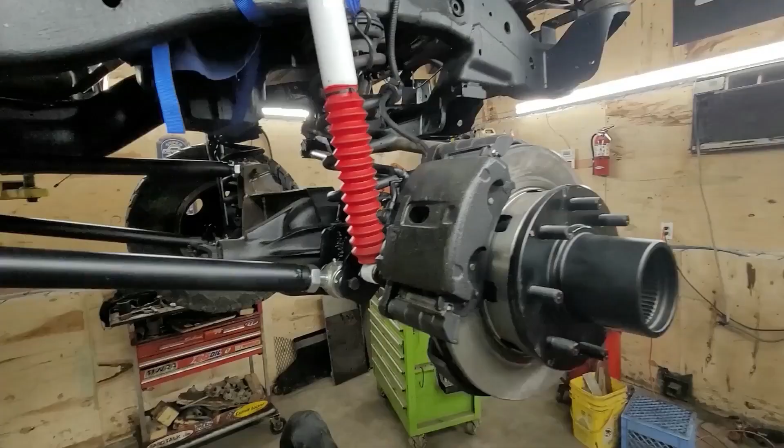Alright, big day here, guys. Just got the plate for this thing. It's insured, registered, all that good stuff. Legal, as far as the government's concerned. Other than if they took a look at it, it wouldn't be, but they wouldn't know what they're looking at anyways. We're sure of that.

Been bombing around here at my dad's place at the farm for a few weeks, just getting the tune kind of dialed in. There's my plate, so I'm gonna get it over to my house and we'll finish up. I'll get the plate on the bumper and a few other little things to take care of, but she's a performer, just performing.

So do some more tuning on it and get the radio, passenger seat shotgun. Told him he could get shotgun the whole time we've been working on it, so now's the time. But we got just a little bit of petrol here, we'll get that dumped in her and we'll be off.

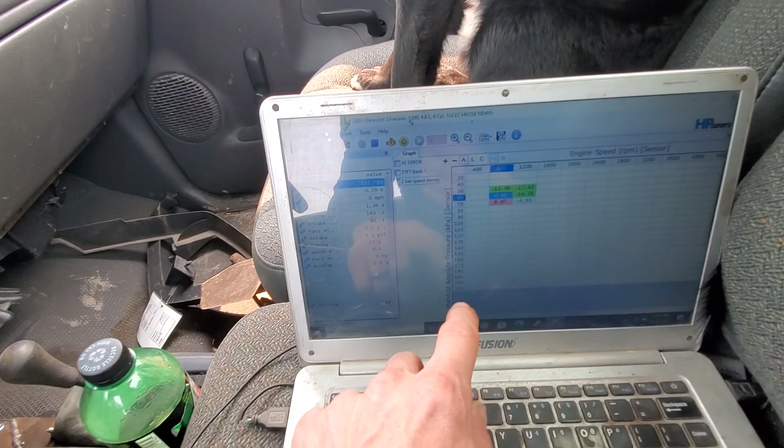If I hit the throttle here, this is going to bounce just like that. The idea here is to collect as much data through all these cells as we can, from idle all the way up to like 6,000 RPM, which we're not going to hit right away. Then we're going to get down here—this is going to be into boost, anything over 100 kPa boost. So we're going to see how she all runs there and how she goes, I suppose.

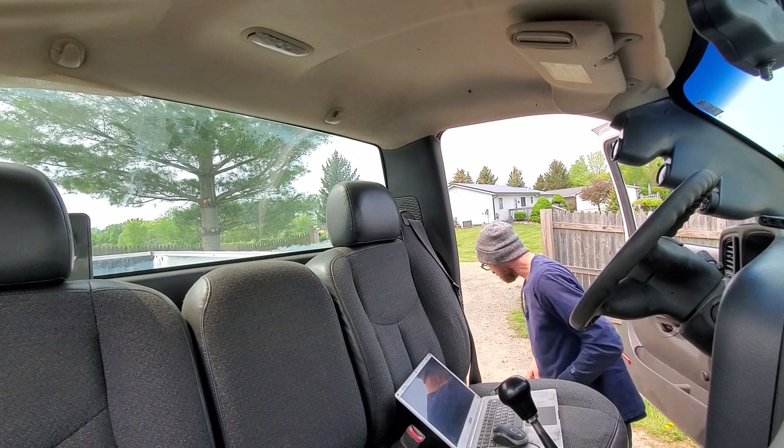I made it. You did it. So we made it back. Excellent, excellent, excellent. I can't be more pleased with our first test drive.

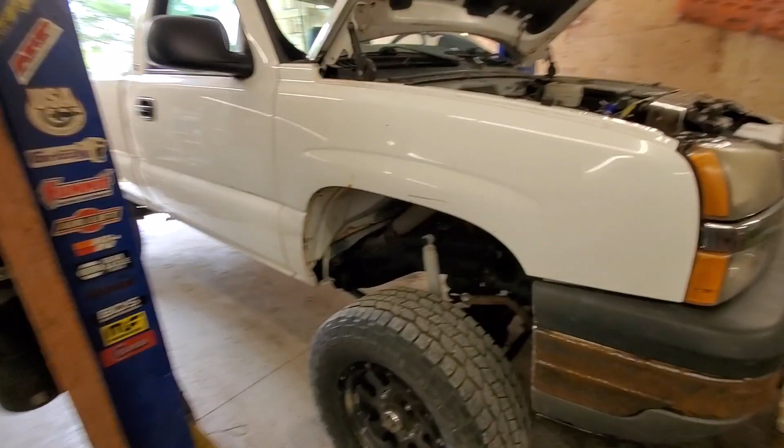I cannot underestimate enough, or cannot exaggerate enough, how much I underestimated the amount of heat my turbo was going to make.

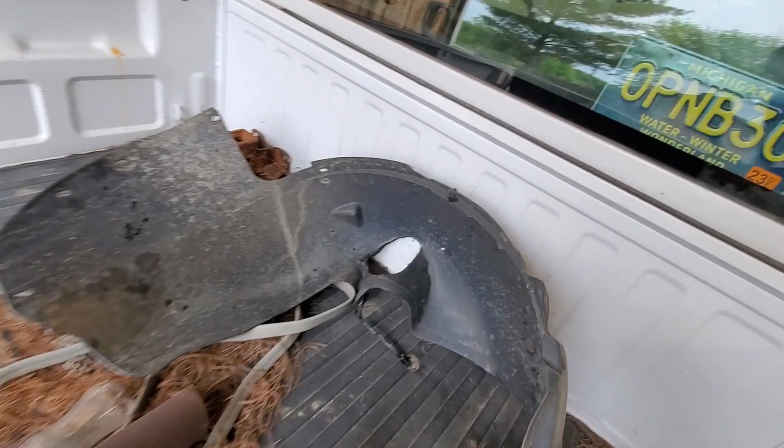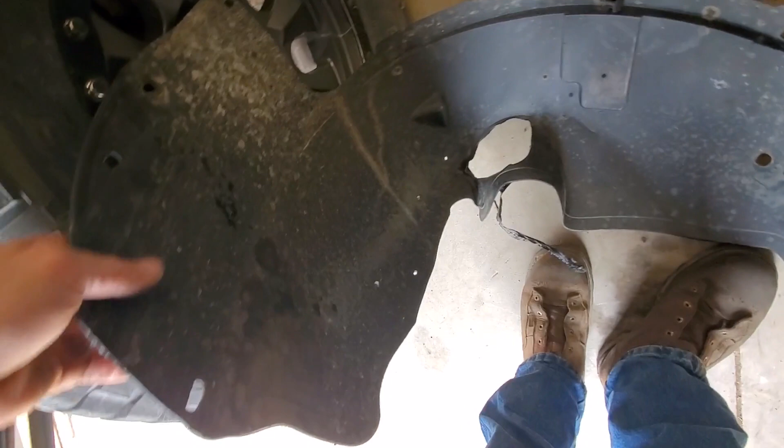I got a little cooling hole there now. So that guy's junk. I'm thinking just no fender liner for that guy. Woo!

So now we're going to give her a once over. I've got some wrapping I'm gonna have to do over here. That AC hose will not live right there. There's no doubt about that.

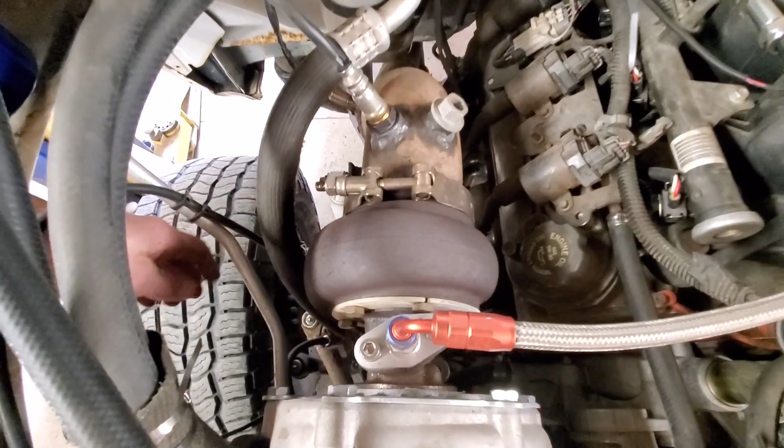So looks like I already split it even. Oh yeah, so I junked that. Bummer. Thing makes some...

At least that's just the one piece, and that's not a manifold style fitting, so that's good. Good, good, good. But there's a lot of heat comes out of here.

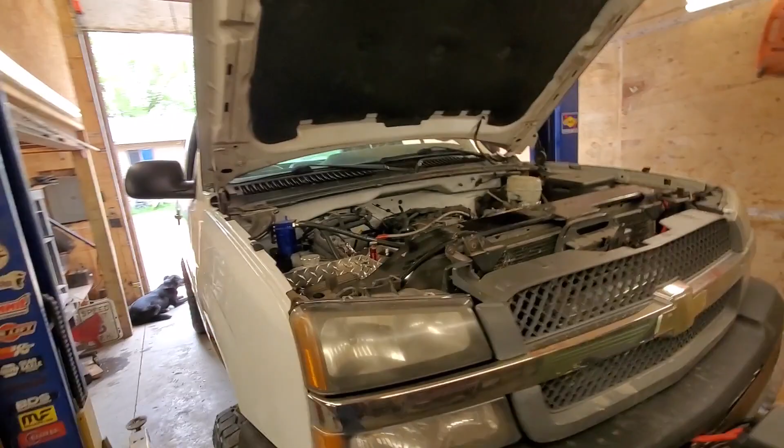Wowzer. How you holding up, little guy? You're doing okay. A lot of heat, but I think everything held up all right. I'll give her a once over here and get back with you.

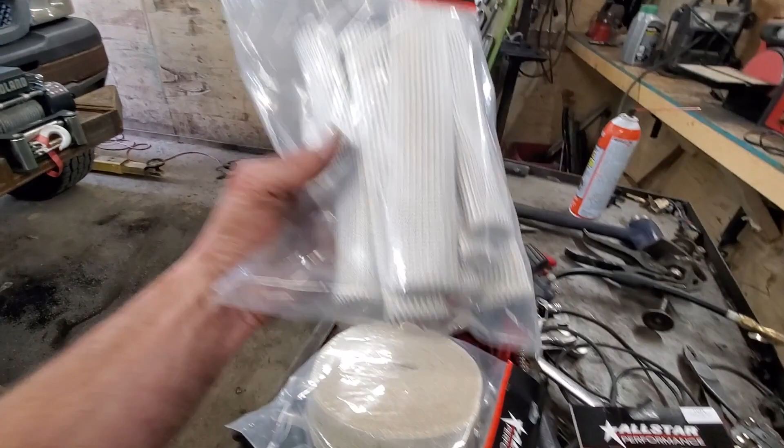I'm back from the auto parts, and I've got a whole mess of heat wrap and some spark plug, little tubulars there. So, did not like the heat.

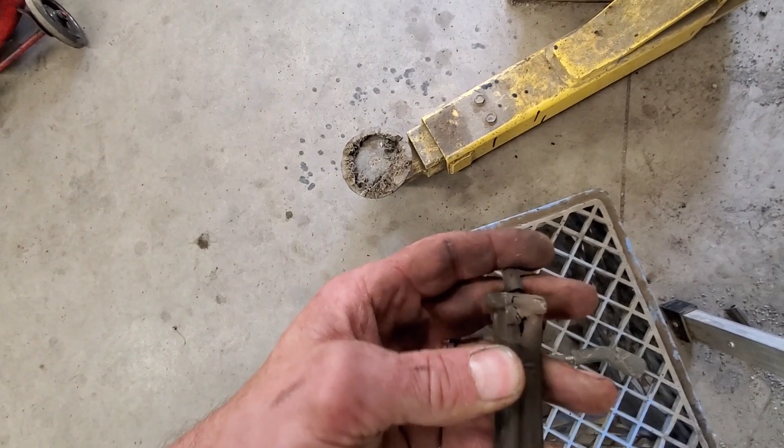I crispified all my wires here, meltified them on the driver's side. So we're going to wrap them. I thought I had enough room, but I was wrong. This is the part where I'm learning too, because I do not know anything about turbos, and I've immediately learned that you get a lot of heat.

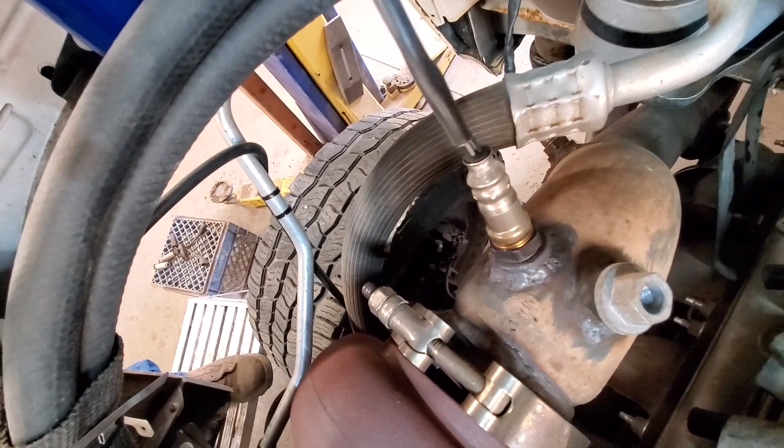So yeah, melted all those, and then I melted my low side AC hose. I don't know if you guys can get in there to see that or not. Right there, she's split. So that's all done, she's gone, but everything else is holding up on it.

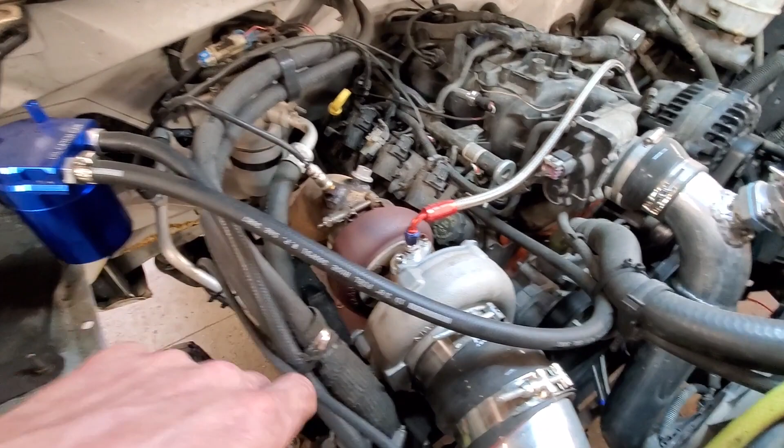So I think heat management over here, I'll get a turbo blanket for it too, and hopefully that's going to kind of take care of all of these woes. Otherwise, looks like we're in good shape. Everything's holding together on it.

I was making boost, that was making about 8 pounds there, and I think that's about where I've got my wastegate sprung for. So that's all right. I didn't have the blow off hooked up, so I'm going to get that hooked up too. We're going to make some noises and try that.

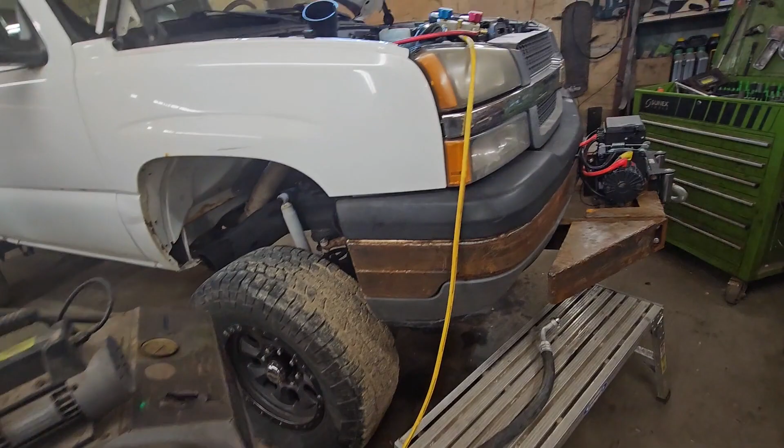Today we're working on the 2005 6-liter 2500 NV4500 turbo truck here. Too much to really list off, but anyways, this creation here is what we're working on, trying to get some air conditioning going on it. So far, I've been running around quite a bit, getting the bugs worked out of it. Haven't shot any video, I've just been too busy, but today we're getting AC going.

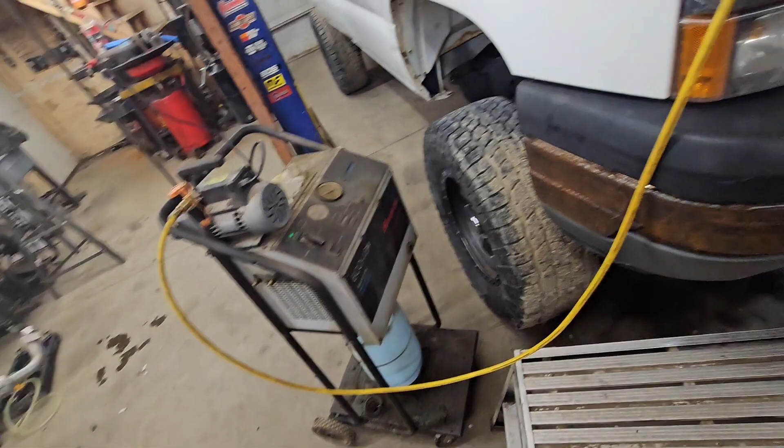I melted my suction hose on my first run out, so got that replaced. Now we got a nice suction hose down here wrapped, so I'm gonna have some air conditioning in this unit. It's rained every single day this summer in Michigan, just crazy heat and humidity. So we're gonna get the AC going, but haven't had problems otherwise, just been kind of tuning and adjusting everything.

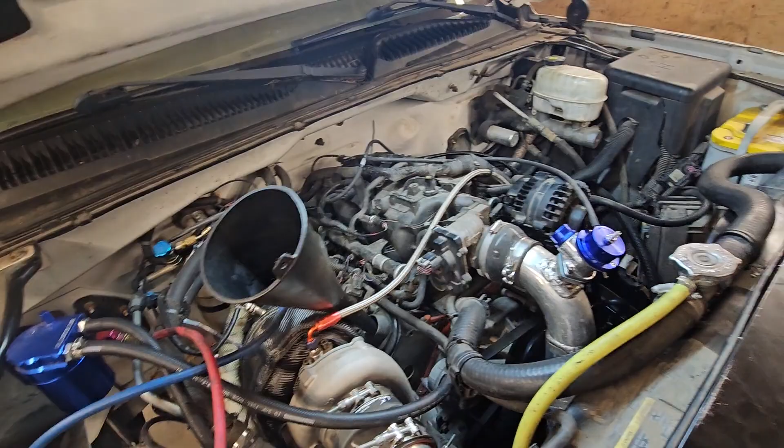Today I also just put in new steering gear down there. You can't see, but there's a new pump on there too. My pump was whining, so I just wanted to get that taken care of. Steering gear had quite a bit of slop in it, and then my steering shaft also had quite a bit of slop in it after I've been driving it some, just trying to get it all tightened up.

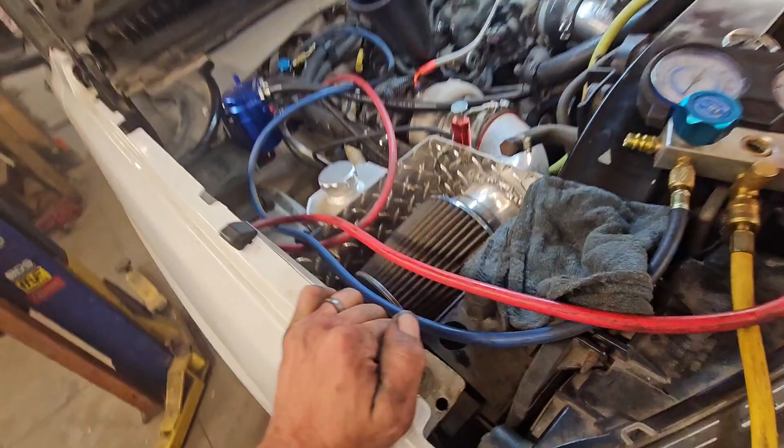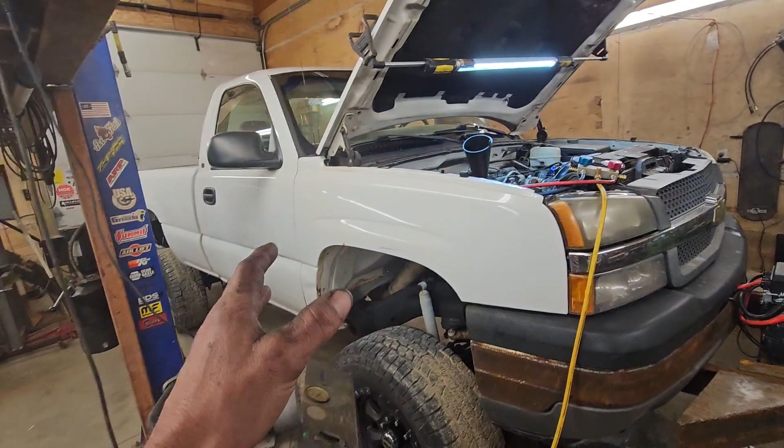But everything's working out great so far, so we're gonna get this AC charged up, take it out in the crazy heat out there. It's not too hot in the shop though, I got the door closed and I've been running the air conditioner, so it's actually like 70 in here. Feels pretty good.

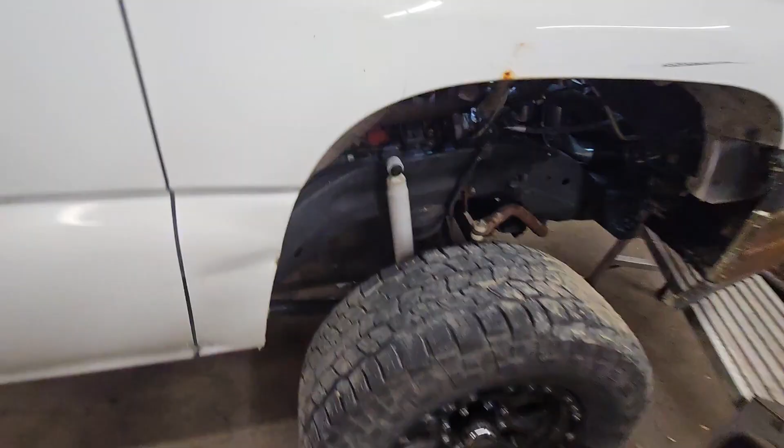Anyways, this thing's just been one heck of an outfit so far. I did a bunch of other work, got my steering all done up, put the sway bar onto it. I've also got some limiter straps under here now.

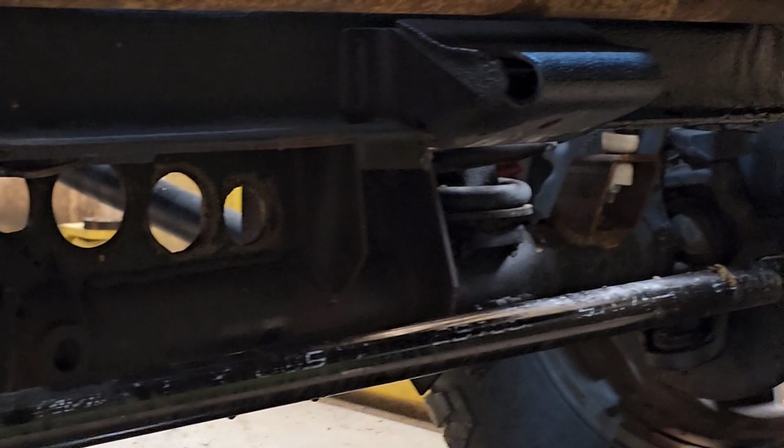Can't see a whole lot of it in the darkness though, huh? Not really. But anyways, it's all under there, you just gotta trust me. Let me get some flashlight in there.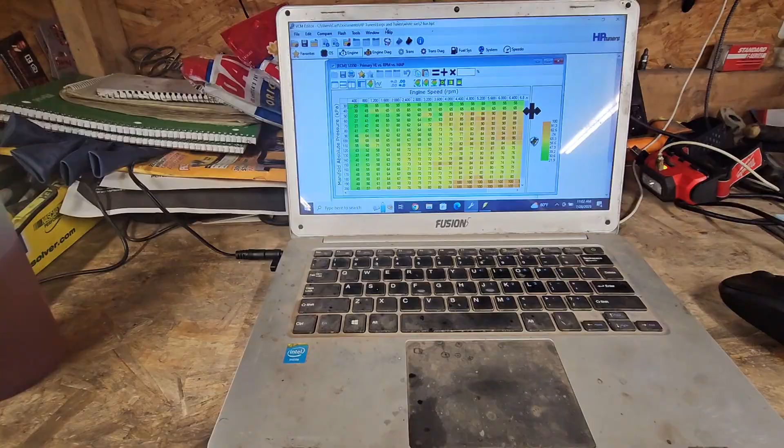This is HP Tuners here, what I use for software to tune most of my stuff, all of my stuff. And so that's kind of what it looks like in general.

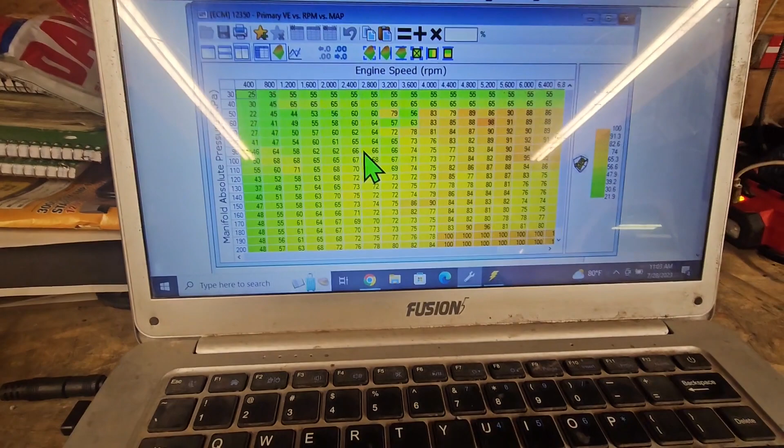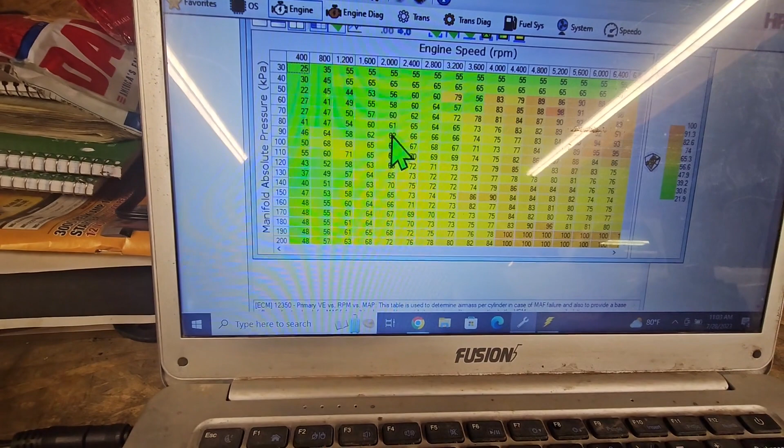We're going to be in this main VE, and that stands for volumetric efficiency. Basically just got this table here laid out, and I've had to reformat mine since I'm in boost to a 2-bar. So basically my manifold pressure here, measured in kPa, goes up to 210 on this table. Yep, 210. And that's why it's a little different than what would be a stock table here, and it's looking pretty ugly because I'm still in the tuning process.

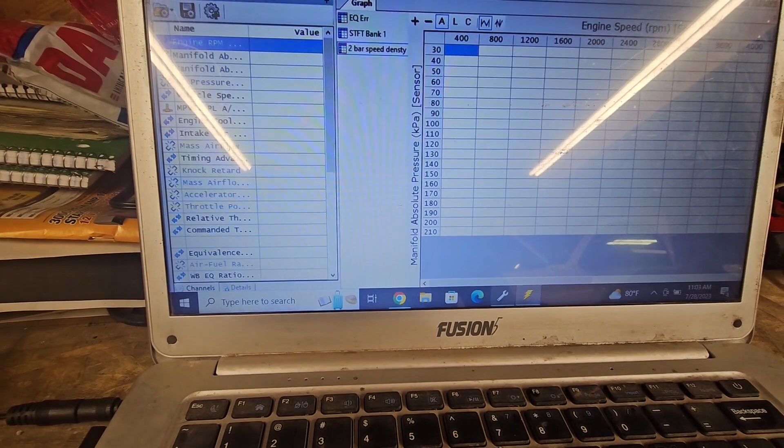What you actually do is use the scanner hooked up with my wideband, and it will actually graph the error in here as far as air-fuel ratio, what I'm running comparatively to what I'm commanding. Then you just plug in that difference as a percentage into this table, and that will correct all these values. It's more complicated probably to describe it than to actually do it. Once you see somebody actually do it, it's not really a big deal.

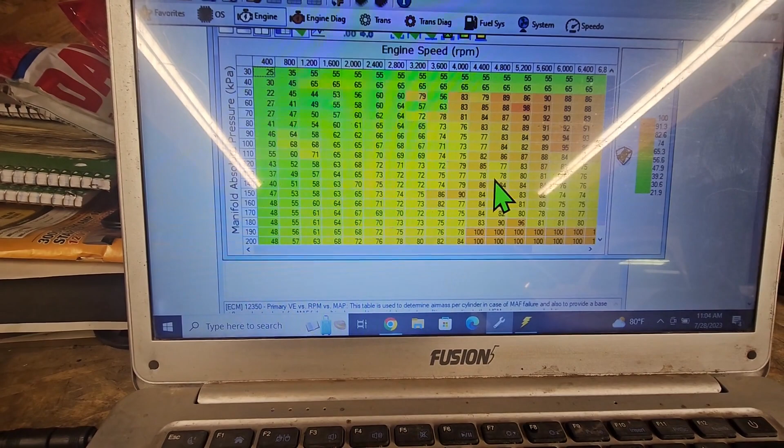But anyway, that's the gist of it. Basically, once we drive it, this table here will have a whole bunch of values in it, basically right around this area here where we actually run the truck.

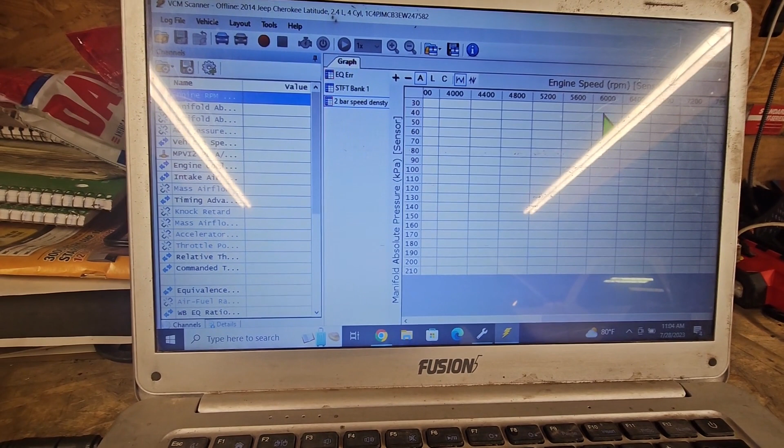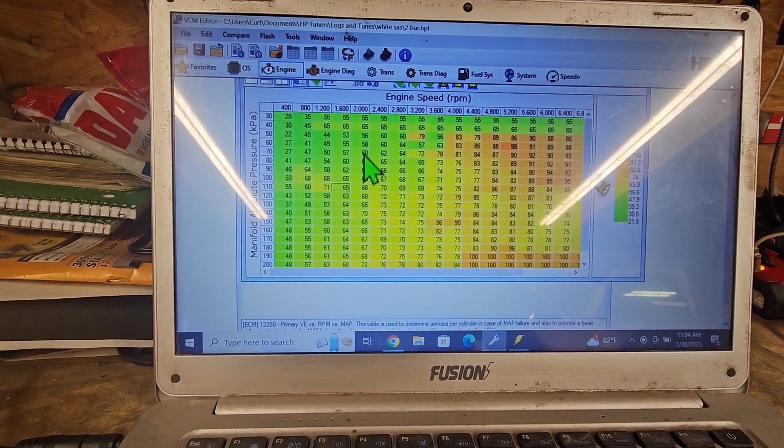It's actually a lot harder to get anything over here because we're limited at 6,000 RPM. That's where I've got it limited, so we're not catching anything in this table up to 6,800 RPM, and I'm really not even going to run it up to 6,000 RPM that much. It's pretty obnoxious to just be street driving it. So for the most part, we're just ironing out this part throttle driving area, and that'll translate to this part of the table here, and try to get that cleaned up, then we'll keep going.

Right now I'm currently making about 5-6 pounds of boost, so it's not super impressive. I'm not blowing tires off of anything, but just verifying the theory that everything there is working and functional, and then we'll turn up the boost as we need to, just a little at a time, to see what she'll take.

I'm not going to push the limits and blow it, but if it happens, it happens. It's automotive mechanical crap, so anything could happen. But basically I just want to go ahead and get her pulled up, so we're making as much as we can with it. I think 10, 11, 12 pounds should be fine on this motor, and if it don't hold, I'll build another motor that will hold it. So let's get out and try to do some tuning on it.

Alright, this is going to be nice. First time I've had the air working in this truck, so hopefully get some good audio out of it. It's nice and cold in here. Recirculate that stuff. Yeah.

Feels good. Alright, now let's get down to it. May not be the best camera angle for you guys to really see what's going on. I know, I'm just one guy. I've only really got a couple good cameras, so doing what I can for you.

But I do know right off the bat that I gotta get this transmission back out of here and do the first and second synchronizers. I mean, just go through the whole thing and rebuild it. My synchros for first and second are both totally shot.

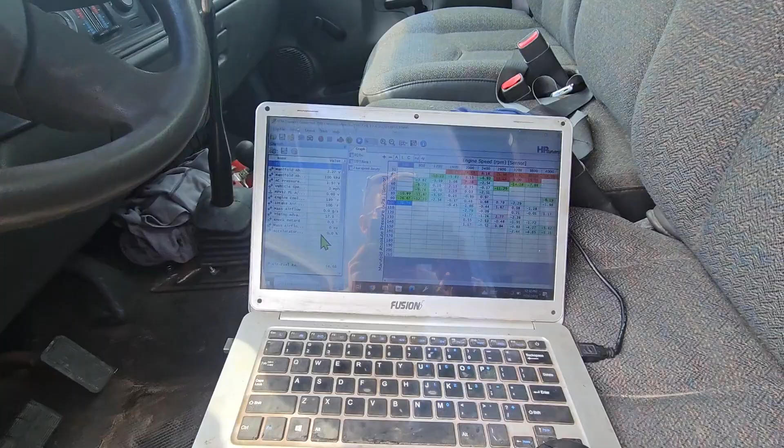Alright, now we're out here, back in the heat, out of the AC, and I'm going to let you guys check out this chart here. So this is what we have as far as our data.

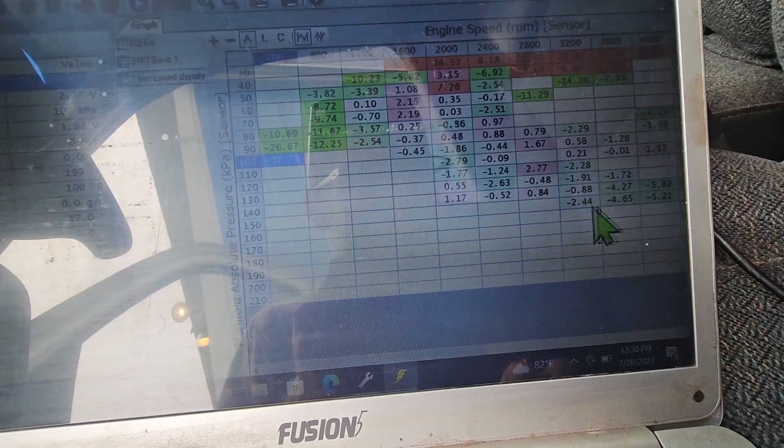Alright, let me try and get this in the right zones. Okay, so this is all of our data. We maxed out at 150 kPa, about 7 pounds boost right there, and that's just where my wastegate sprung at. This is all the area that we basically drive it in. I did get it up close to about 6 grand there, we went to 5,600, so we got some good data.

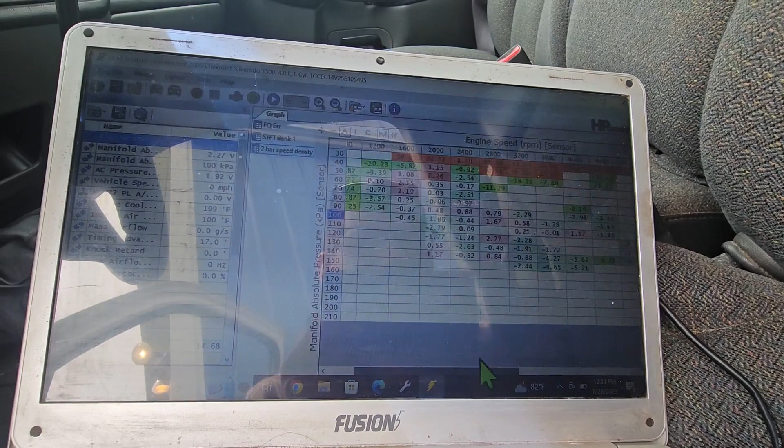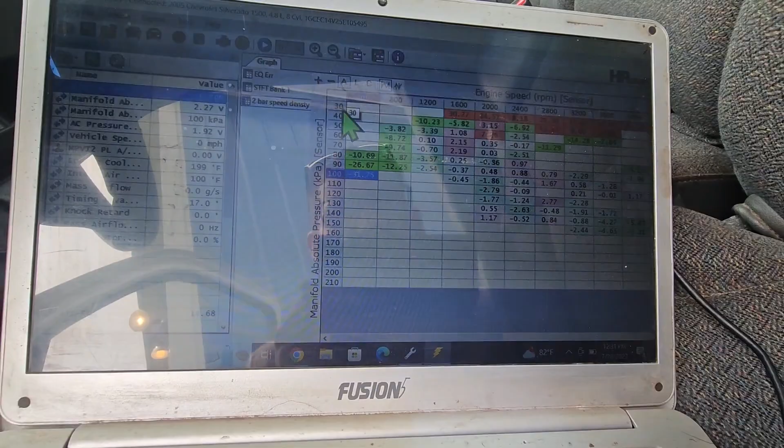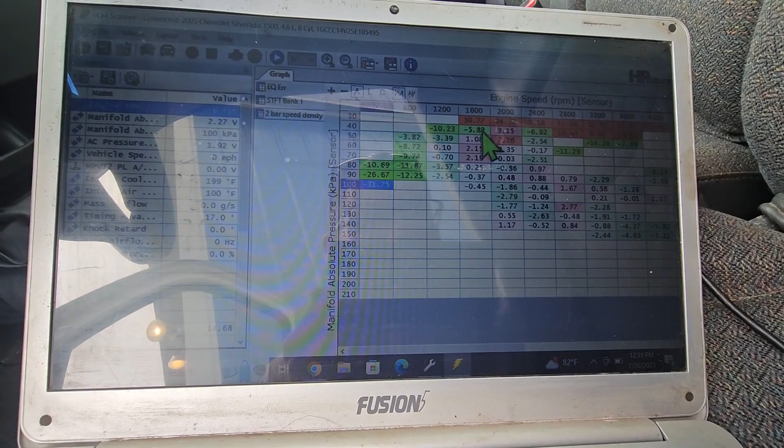This is all green, so that's rich. Anything red is going to be lean. Anything down here at this 30 kPa, that's going to be on decel. There's no way this engine makes 30 kPa of vacuum pressure, but it just doesn't. So that's on decel, all just letting off the gas, shifting, or slowing down. So this is all invalid data across this, and even a lot of this at the 40 mark is going to be invalid data, so I don't worry about any of that.

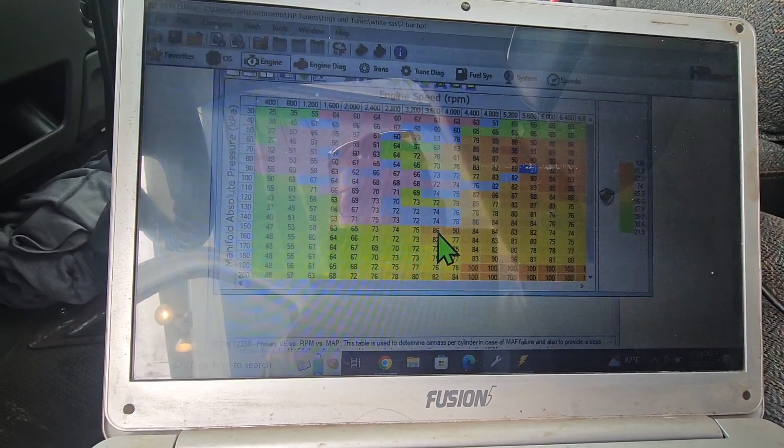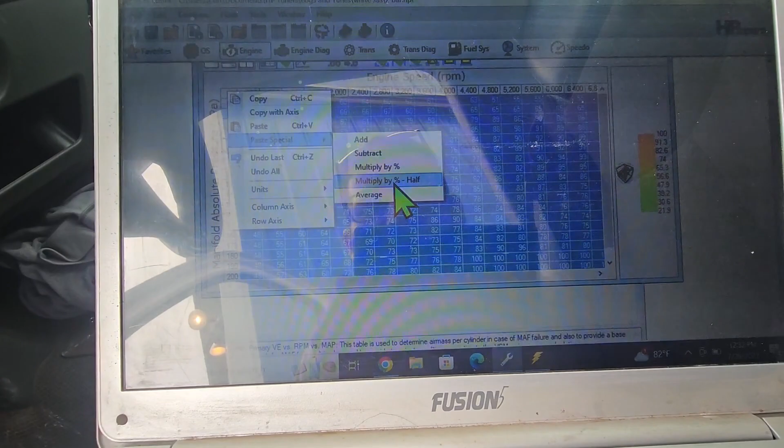But then you just take here and copy just like that, and come over to your editor table that I was talking about earlier with the volumetric efficiency. Then up here in the corner, you left click, right click, paste special, and then you can add, subtract, multiply by the percentage, or multiply by half of the percentage. So I multiply by half the percentage, that way you're not overcorrecting one way or the other. You'll usually end up a lot closer to where you want to be. So multiply by half, and then we'll check the table back out.

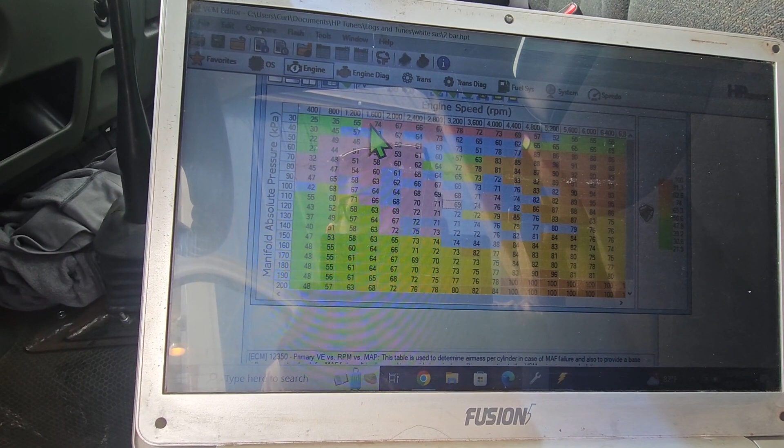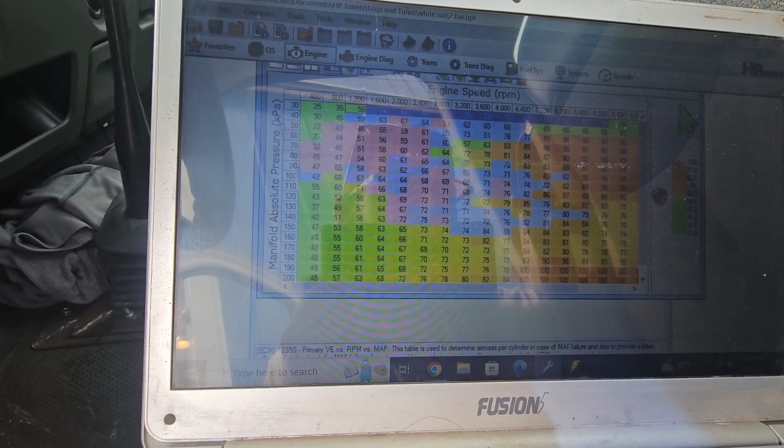So across the top here, all these values that were red because they were lean, they got changed. But like I said, they're not really lean, we're just on decel. So I'm just going to plug some numbers in here if I can. Somehow I moved my table all around here and screwed that up. No mercy. Okay, maybe I won't this go around, we'll have to exit and redo her here. But that's the gist of it. And then once you multiply by the percentages, then you're good to go.

Opening up here, a little wide open stretch, and we'll put her to the floor and see what she'll do. A lot of people out driving today, got nothing better to do, I guess. I'm in the same boat, you could say.

Oh yeah, good opening here. Got a car coming, and we're gonna give her the old... purr.

Okay, this is a 4th gear pull, no downshift, going from 57 miles an hour. Look how smooth this is.

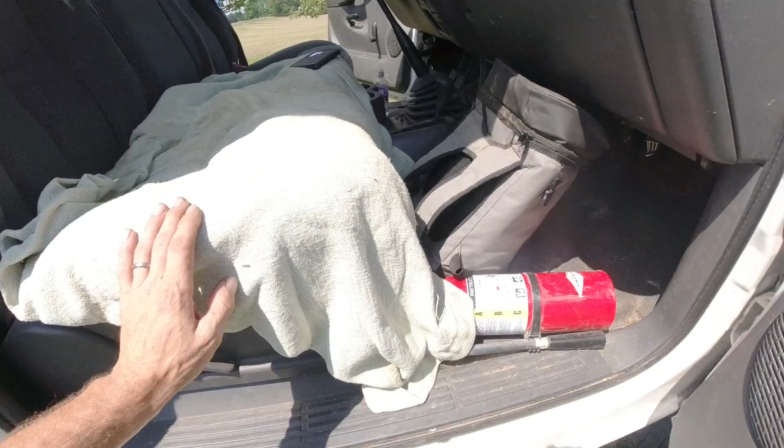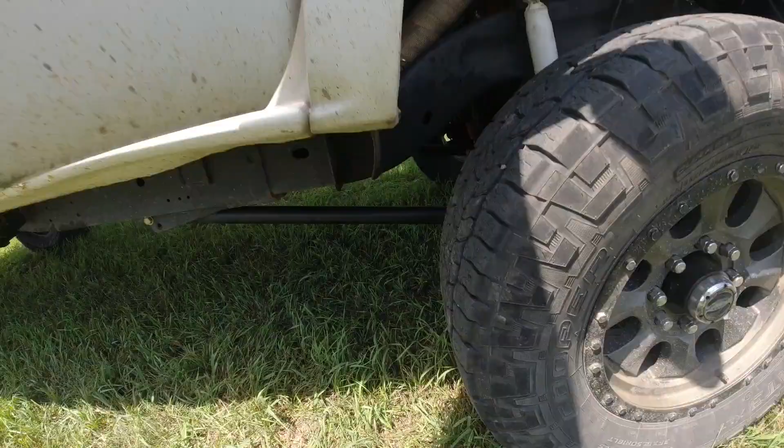Turned out spectacular. We're missing our front drive shaft. Some of you may notice that.

That's the only part that the truck's actually missing that I know of, besides that fender liner right there. Everything else is here. This tailgate's plastic. Pro-Tec composite box is what it came off of, so I've got it mocked up to fit somewhat on the steel bed, but I've still got to work on it. That doesn't open, so we're gonna get that going too.

But she's just a fire-breathing monster for sure. This is driver's side, what everything looks like here. Clutch pedal outfitted.

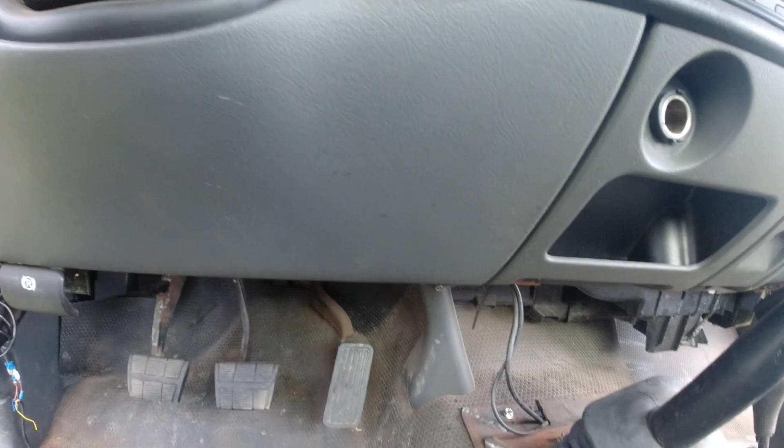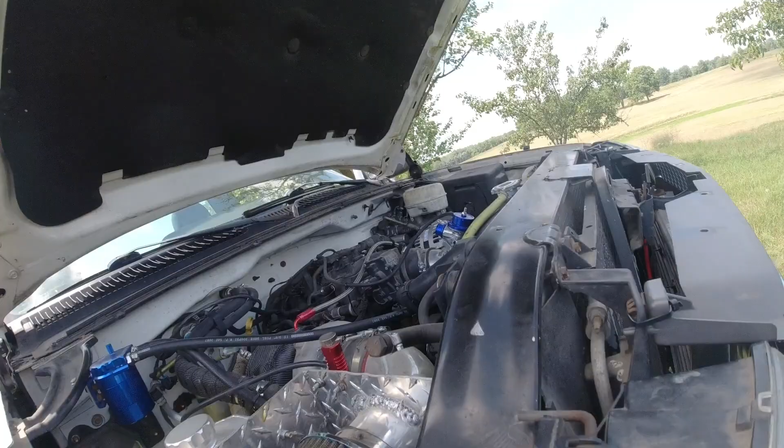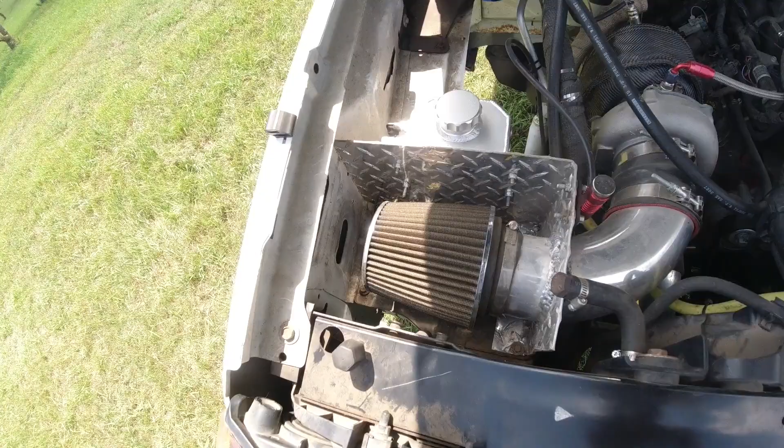We'll go under the hood. And this is under the hood here. Everything you would expect to see maybe under the hood of one of these outfits.

And so here's our turbocharger onto our eBay manifold there. Downpipe that got made out of the old tailpipe off the 2500 HD. Coolant reservoir, blow off valve, wastegate's down lower there, recirculates back in.

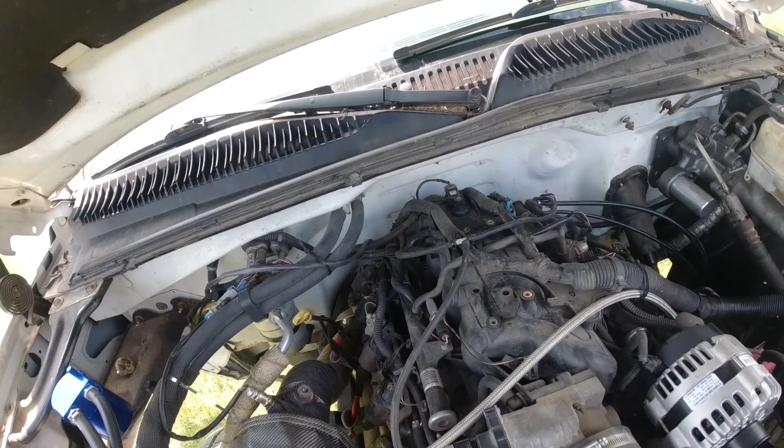Otherwise here, I thought it's just a 6-liter, and had to overcome all my heat issues here and get everything wrapped up. Some high temp plug wires on this side, along with some wrap on those, wrap on my low side suction AC there. Intercooler.

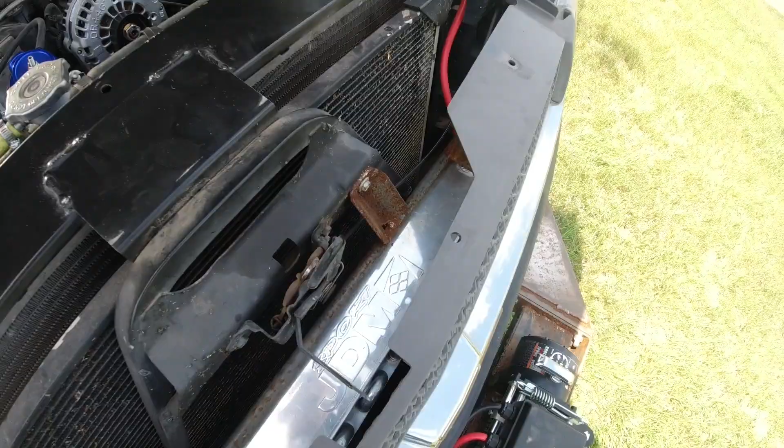Winch on the front for who knows what. I don't think this truck's going to do a whole lot of winching, but if it had to, there it is.